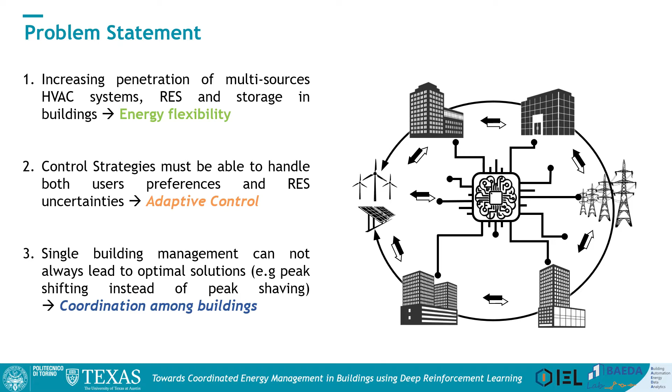This concept becomes even more profound for clusters of buildings, where grid interaction must be handled. At higher level, there is therefore the necessity to enhance cooperation among buildings to increase energy savings, user comfort, and grid stability. The previous points could be achieved thanks to the novel concept of coordinated energy management. This concept arises from the necessity to manage the aggregated power demand of a number of buildings. In particular, it should consider integration of renewable electricity at single building level, the optimization of the cluster energy consumption, and the interaction with the grid, to reduce peak demand and increase grid stability.

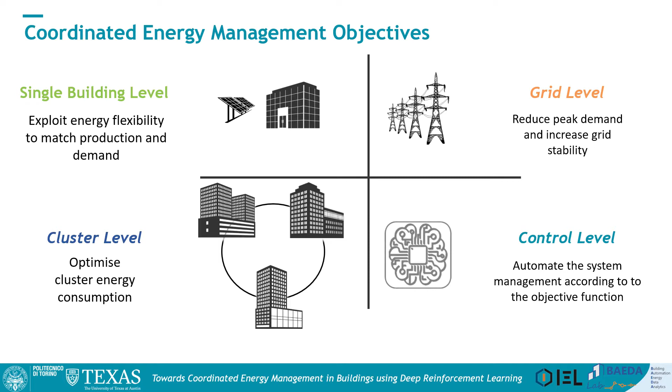In this framework, energy management should leverage automated control strategies, able to adapt to a changing environment made up of different actors. After a literature review, we have seen that a lot of effort is devoted to single building optimization, and while some innovative works have tried to use advanced control strategies at cluster scale, such as heuristic control and model predictive control, they suffer from scalability problems due to their model-based nature. To overcome these limitations, we use an adaptive and potentially model-free control strategy, deep reinforcement learning, with multiple buildings.

This is done also thanks to the use of a novel simulation environment called CityLearn, built by the co-authors of the University of Texas to test reinforcement learning control strategies for energy management. Finally, the paper explicitly assessed the potential benefit of a coordinated approach at three different scales, starting from the single building level up to the cluster and grid level. In the following slides, I will briefly introduce reinforcement learning, followed by the description of the case study and the framework developed during the work.

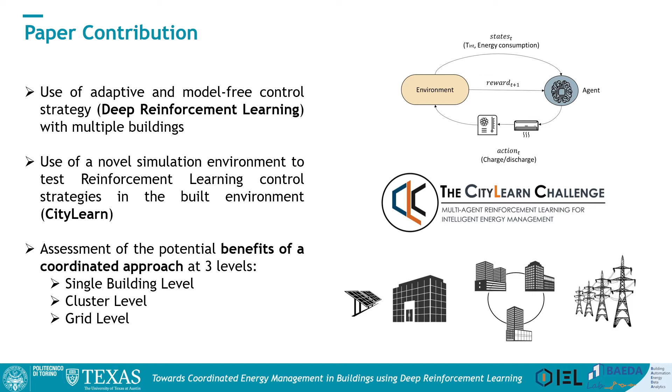Reinforcement learning is an area of machine learning often used in control theory, in which an agent learns a control strategy through a trial and error interaction with the environment. For sake of clarity, I will discuss an example that involves an energy system. Here the controller, called agent, is connected to a heat pump and thermal storage. The controller has the goal of minimizing electricity cost, represented by a reward function, charging and discharging the storage. After performing some actions, the environment provides the agent the corresponding reward and the information about the new states, for example, internal temperature, cooling load, and the electricity price. The agent then analyzes the new information and provides new actions.

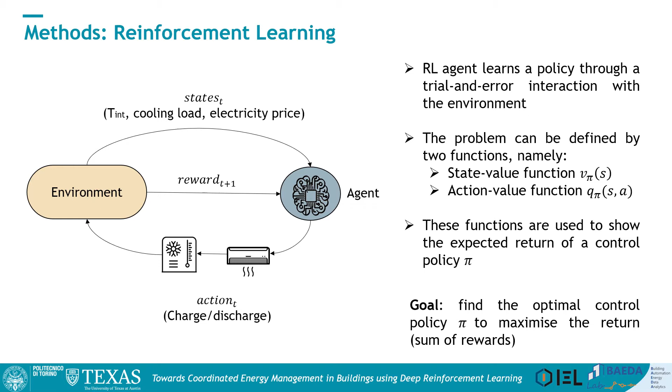Mathematically speaking, the problem can be defined by two functions, the state value function and the action value function, used to quantify the goodness of a policy. Finally, the goal is to find the optimal control policy that maximizes the return, defined as the sum of rewards over the control interval. The combination of reinforcement learning and high-capacity function approximators, such as deep neural networks, seemed to overcome computational problems related to complex state-space representation, leading to what is called deep reinforcement learning.

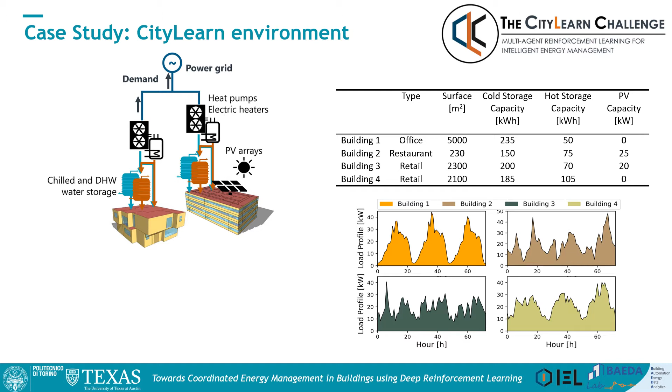As previously said, the case study used the CityLearn environment, created by the University of Texas at Austin, to test reinforcement learning algorithms for energy management. In particular, the buildings are equipped with heat pumps and electric heaters to meet cooling and domestic hot water demand, coupled with chilled and hot water storages. Moreover, some buildings also have PV arrays. In the bottom right figure, you can see how we selected 4 buildings with different profiles in both shape and intensity to highlight the heterogeneity of the built environment. Finally, we applied some changes to the environment, introducing a variable electricity price and the detailed modeling of the heat pump.

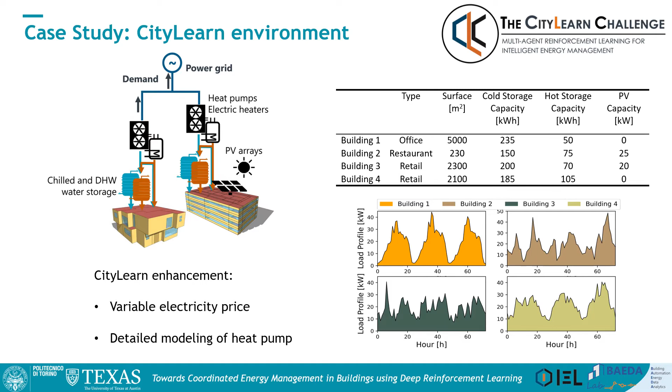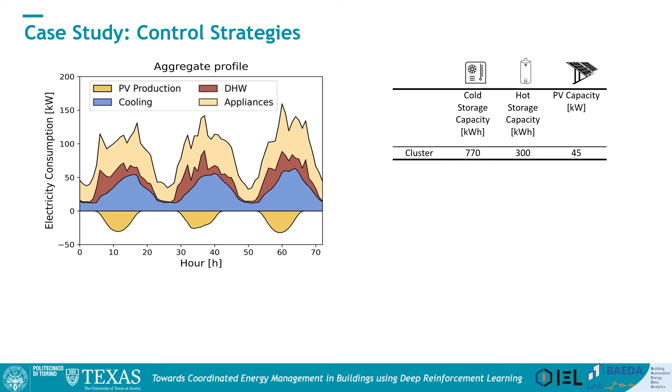To compare our algorithm, a manually optimized rule-based controller was created. The rule-based controller charged the storages uniformly during the night to exploit the lower electricity price and avoid sudden peaks. On the other hand, for the deep reinforcement learning controller, we created a specific reward function with multiple terms.

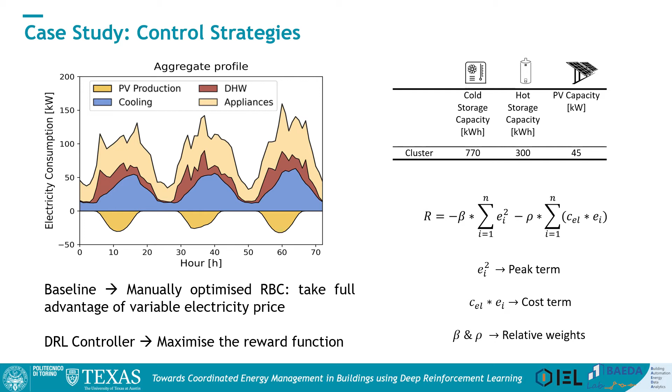The first term tries to minimize the sum of the squared energy consumption, limiting peak demand, while the second one considered the variability of the electricity price with the aim to reduce costs. Both terms are weighted using factors beta and rho to express the relative importance inside the reward function.

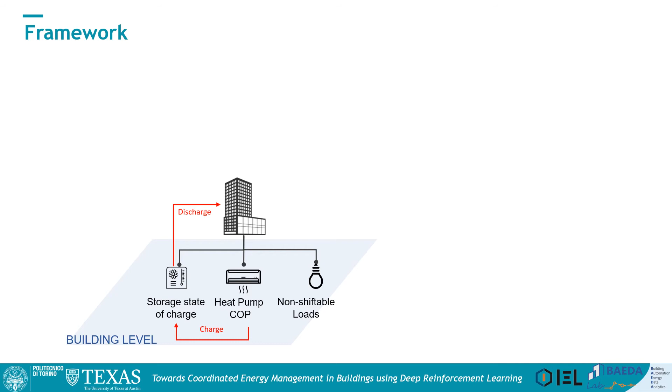Here is presented the developed framework, where first we analyze the single building level, focusing on optimal control of the storage to maximize the energy efficiency of the system. Moving to the cluster level, the diversity of the buildings is taken into account, considering the possible presence of local renewables and focusing on their integration, while reducing the peak demand.

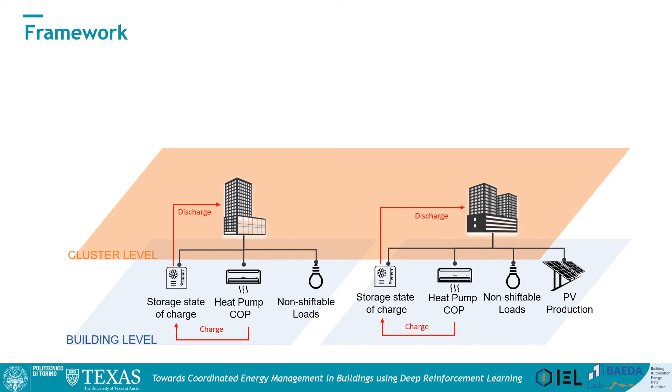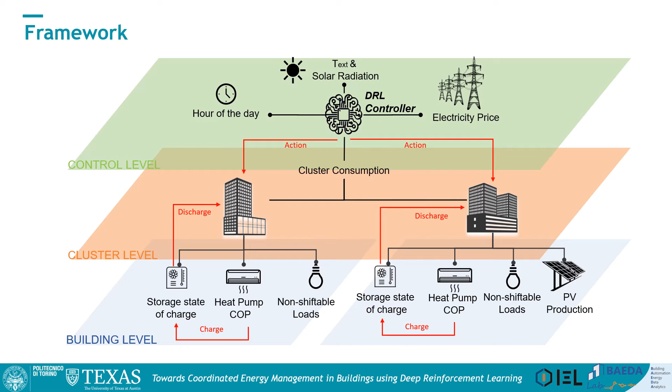Finally, the control level merged the previously acquired information with electricity price and other external variables to provide a robust control strategy. The results of the analysis are presented at 3 different levels, starting from the single building up to the grid level. In particular, we focused the attention during the peak period of the RBC to compare the performance of our controller.

Looking at the single building, we chose the control strategy for the 2 storages, analyzing their dependencies with external temperature and electricity price. While the RBC controller takes advantage only of the electricity price, charging the storages uniformly to avoid peaks, the DRL controller learned the dependency of the heat pump COP on temperature, charging the cooling storage during the coldest hour and discharging it during the hottest hour, while taking full advantage of the lower electricity price during the night.

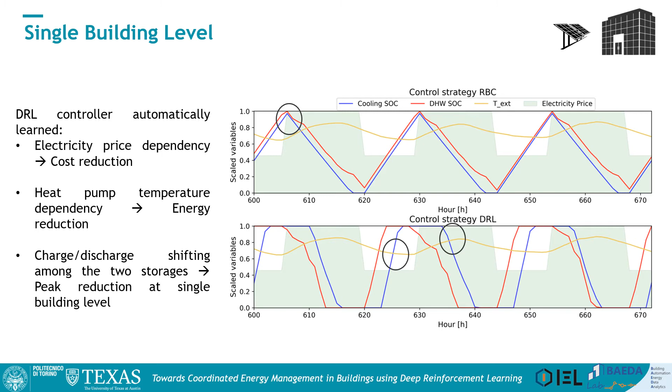Moreover, it is interesting to notice how the charge of the 2 storages is shifted to avoid peaks even at single building level. At cluster level, it can be seen how an uncoordinated energy management may lead to peak creation during the night period to lower the cost of each building. On the other hand, the approach proposed is able to lower this peak while creating a more homogeneous electricity consumption over the day, useful to increase renewable electricity integration.

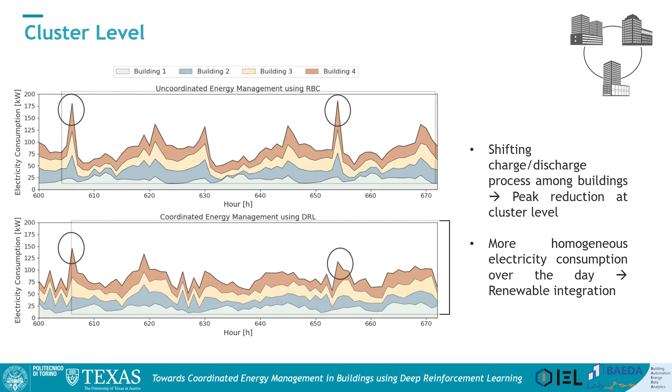Looking at the grid level, the load duration curve is used to highlight firstly the importance of the storages that increase the base load independently from the control strategy. On the other hand, however, the control strategy directly affects the peak demand that could even increase, underlining how the presence of storages could be a double-edged sword for the grid.

Zooming on the peak demand, it can be seen how rule-based control has a higher peak with respect to the no storage case, while deep reinforcement learning is able to reduce maximum demand. The results of the 3 levels are summarized in the table, highlighting how deep reinforcement learning is able to outperform the manually optimized rule-based control.

In particular, there is a 4% energy reduction due to the ability of the controller to assess the dependency of the heat pump on external temperature. On the other hand, electricity cost reduction is mainly due to the lower energy consumption, since RBC was manually optimized to obtain the lower cost.

However, the most interesting differences are in the maximum peak reduction of around 8% and the average daily peak, with a reduction of over 15%. Finally, the proposed approach is also able to decrease the peak-to-average ratio by around 5%.

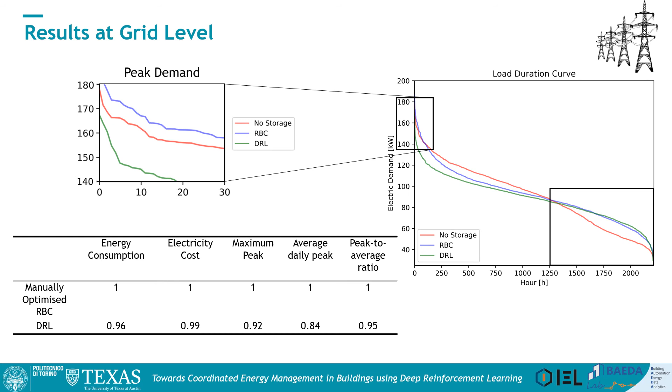Now, I'd like to introduce the conclusion starting with some quotes that gave us the foundation on which the work is developed. The first one is from Aristotle, who wrote, "The whole is greater than the sum of its parts." The presented papers clearly show how it is important to see opportunities beyond single buildings, and that the coordination among them could bring advantage to the community. Moreover, the model-free approach ensured the scalability of the process.

Secondly, Joseph Stiglitz said that what we measure affects what we do. In particular, the design of the reward function that the agent measures strongly influences the DRL controller behavior. Therefore, it is necessary to find the optimal trade-off among different objectives that must be pursued.

Lastly, Albert Einstein once said that the measure of intelligence is the ability to change, and I want to highlight how the trial and error approach provided the agent with something similar to intuition while searching for optimal policies, understanding the dependency of the systems. Additionally, the adaptive nature of the control can be used in rapidly changing environments, for example, with demand response programs.

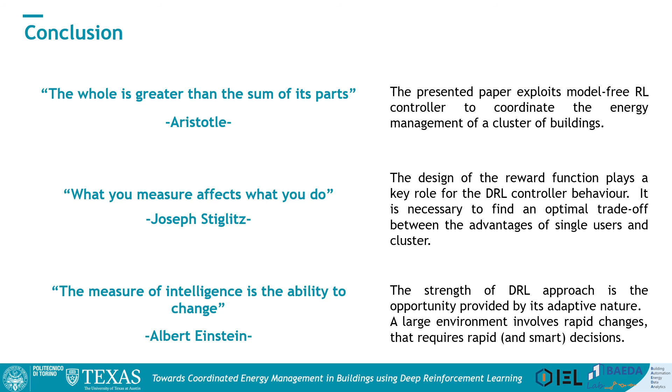Now, what lies ahead? In the near future, we decided to improve the current environment and further explore the advantages of deep reinforcement learning. In particular, we will analyze the effect of the reward function definition on the scalability of the process and work on the comparison of several deep RL architectures to fully understand the advantages and disadvantages of each one.

Additionally, we are interested in analyzing energy exchange among buildings due to renewable overproduction and the resulting changes in the control strategy. All this while we are currently working on the introduction of comfort metrics in the CityLearn environment using black box models.